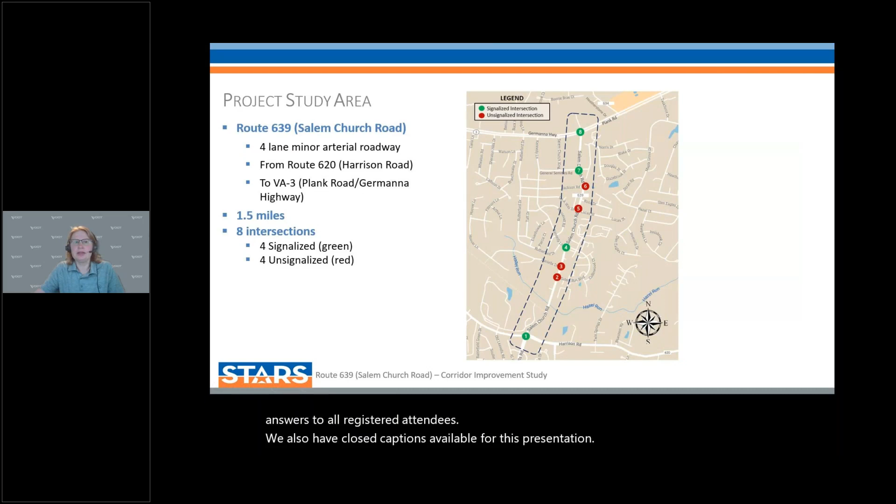This study is assessing potential operational, multimodal, and safety improvements along the corridor of Route 639, Salem Church Road, between Route 3, Plank Road, and Route 620, Harrison Road in Spotsylvania County. This segment is 1.5 miles long with 4 signalized intersections and 4 unsignalized intersections as part of the study.

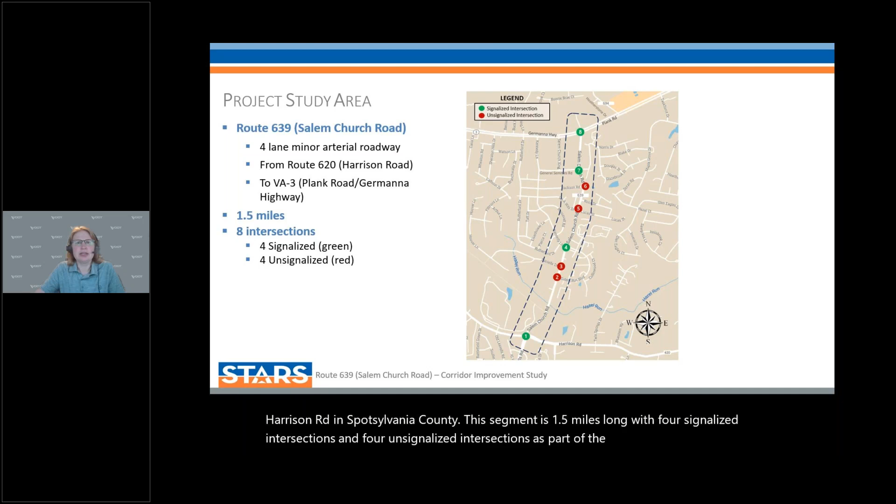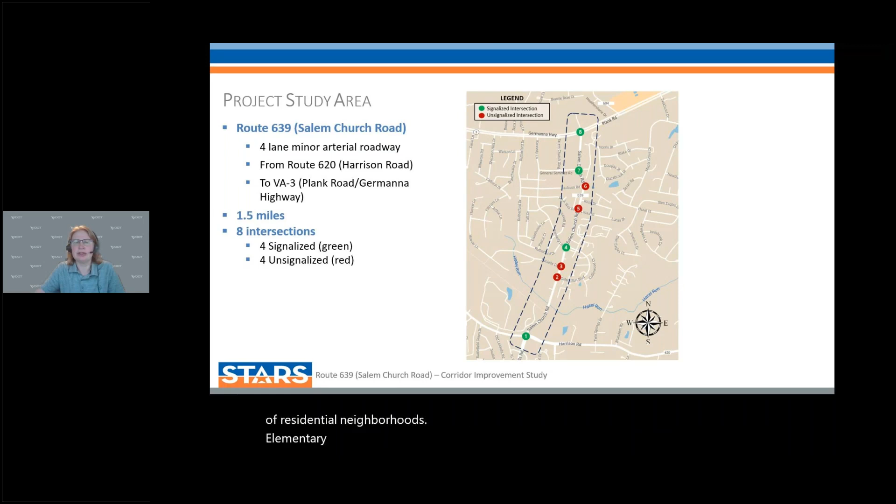Salem Church Road is a minor arterial with a posted speed limit of 45 miles per hour. The land uses along this corridor consist of residential neighborhoods, an elementary school, a public library, senior apartments and medical facilities, a fire station, as well as additional commercial uses such as gas stations and restaurants.

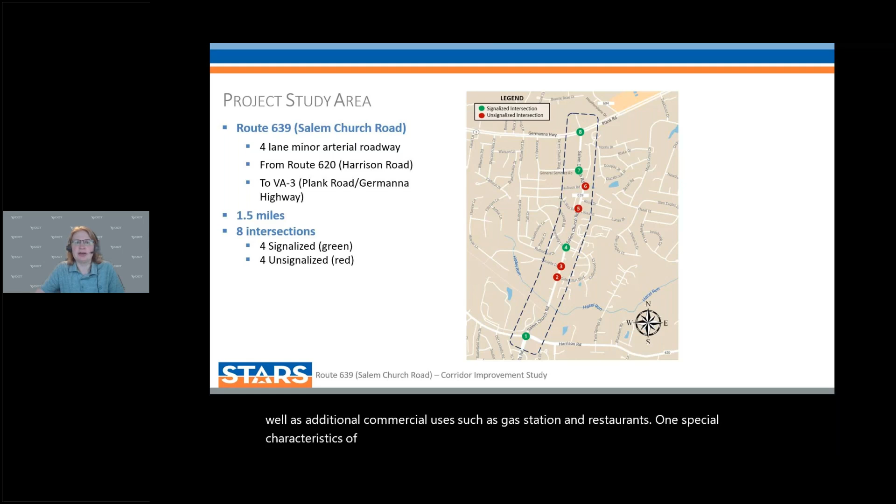One special characteristic of this roadway is that it provides a north-south connection to the west of I-95 and south from Route 3. Incidents that occur on I-95 and Route 1 corridors can divert traffic into the study area.

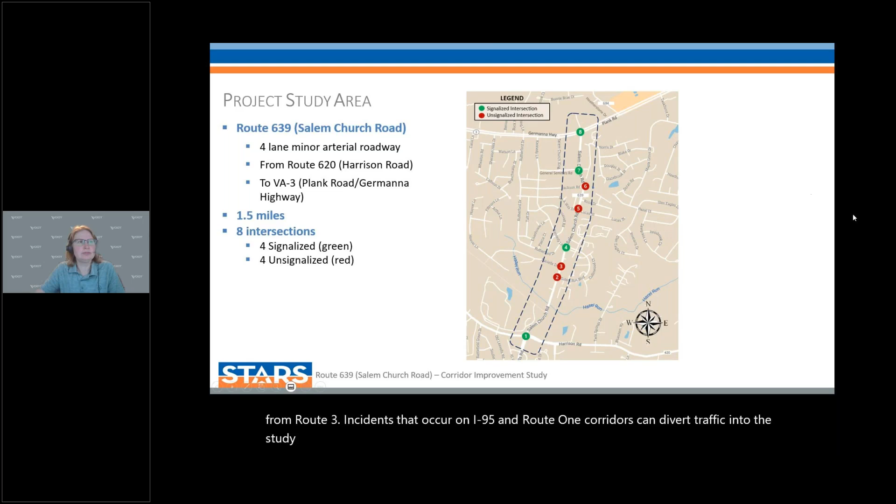The purpose of the study is to consider and evaluate potential improvements to alleviate congestion and address safety, multimodal, and access management issues. The study team analyzed current and future traffic operations and safety conditions to propose potential improvements.

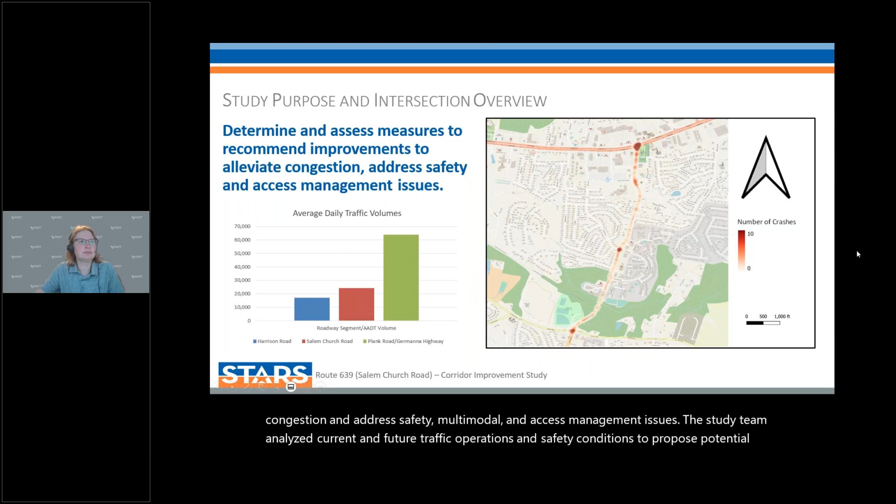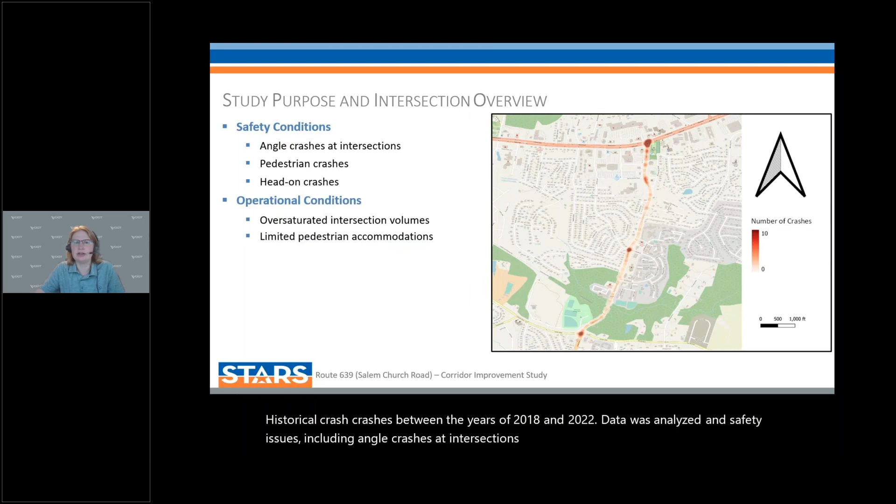Historical crashes between the years of 2018 and 2022 were analyzed, and safety issues including angle crashes at intersections and head-on crashes along segments were identified. Locations of pedestrian crashes were identified to evaluate potential safety concerns and opportunities for improvements.

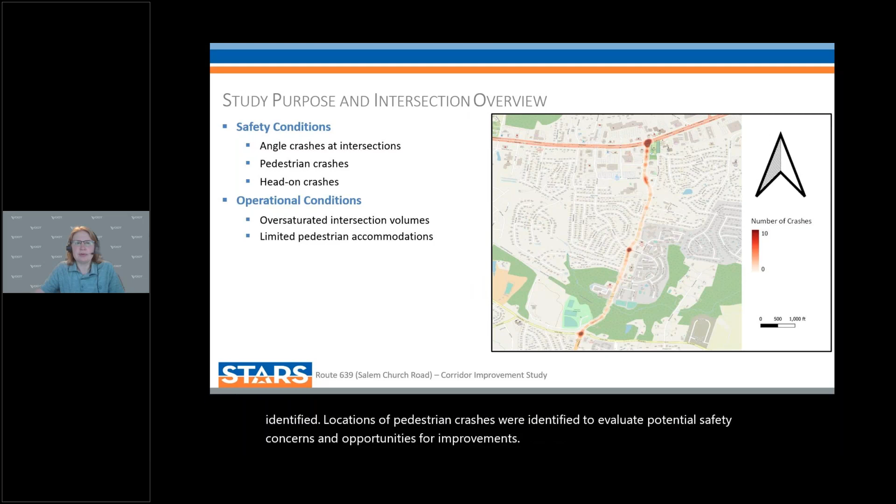Traffic operational conditions include very heavy traffic demand and peak hour congestion at both ends of the study area: the intersections with Salem Church Road and Plank Road, as well as Salem Church Road and Harrison Road.

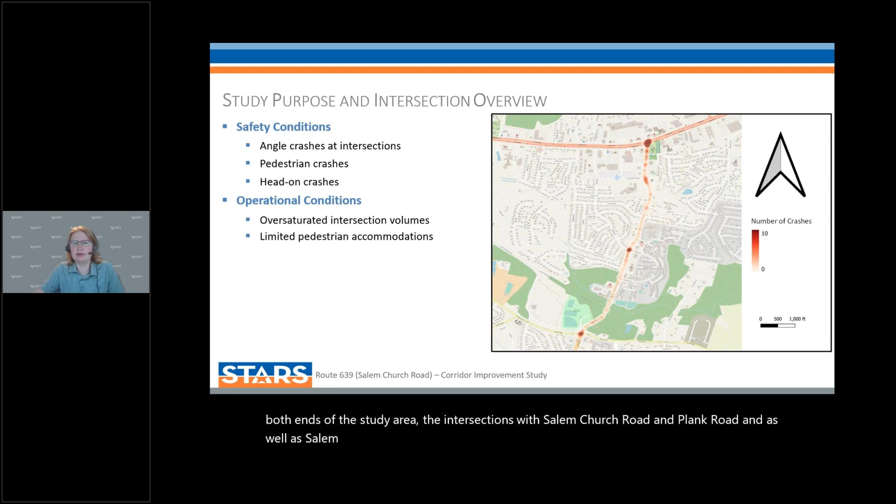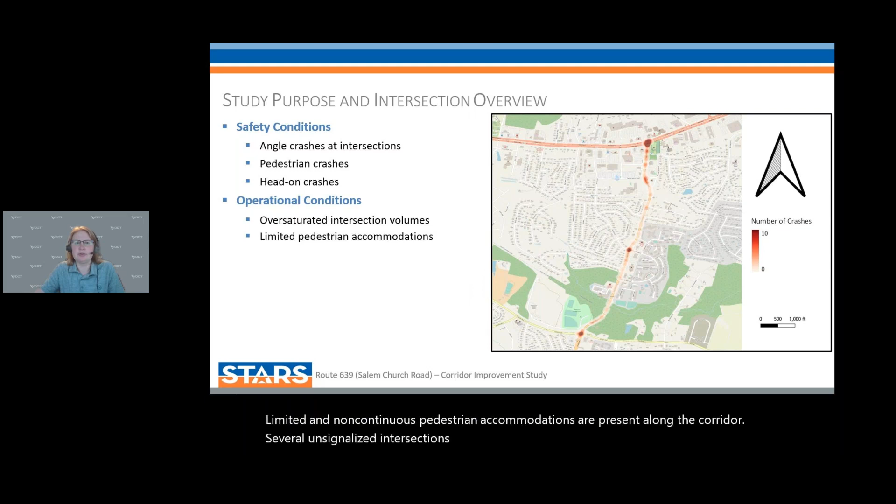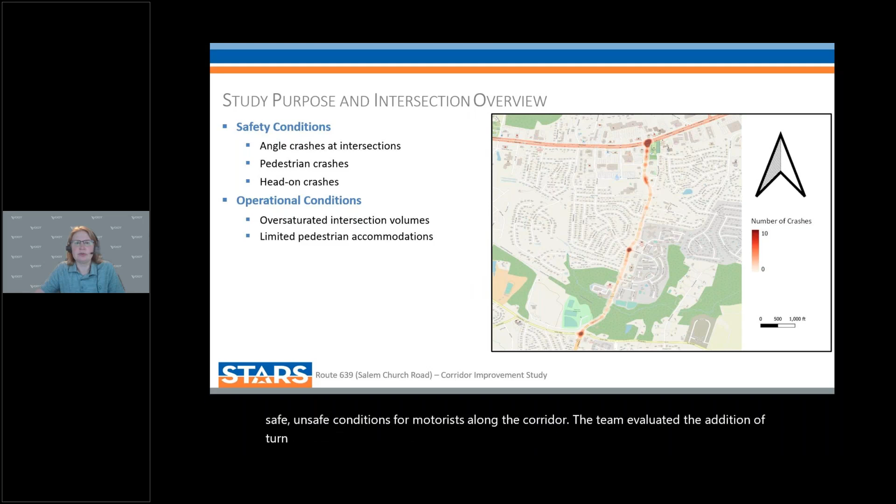Limited and non-continuous pedestrian accommodations are present along the corridor. Several unsignalized intersections and median openings along with roadway curvature create unsafe conditions for motorists along the corridor. The team evaluated the addition of turn lanes, signal phasing improvements, and innovative intersections to improve the existing conditions along the corridor.

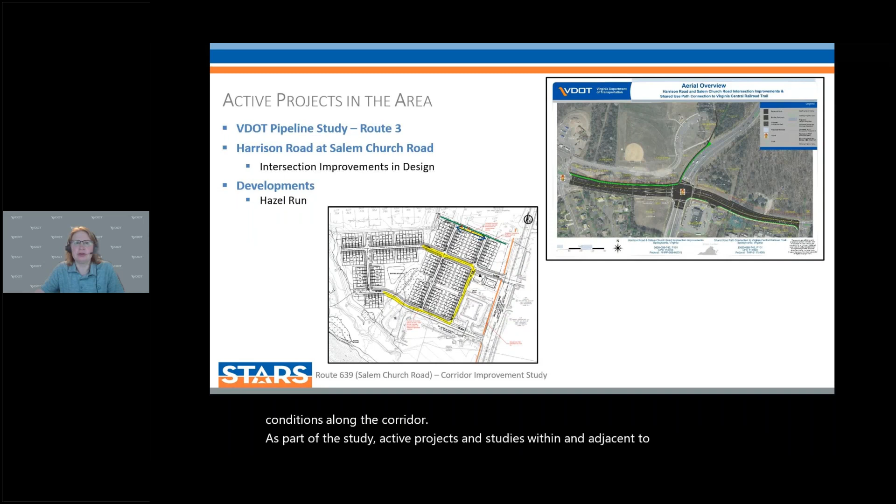As part of the study, active projects and studies within and adjacent to the corridor were reviewed for potential impacts. There is one other study being conducted along Route 3, which includes the intersection with Route 639. Additionally, there are roadway improvements in design at the intersection with Route 620, Harrison Road.

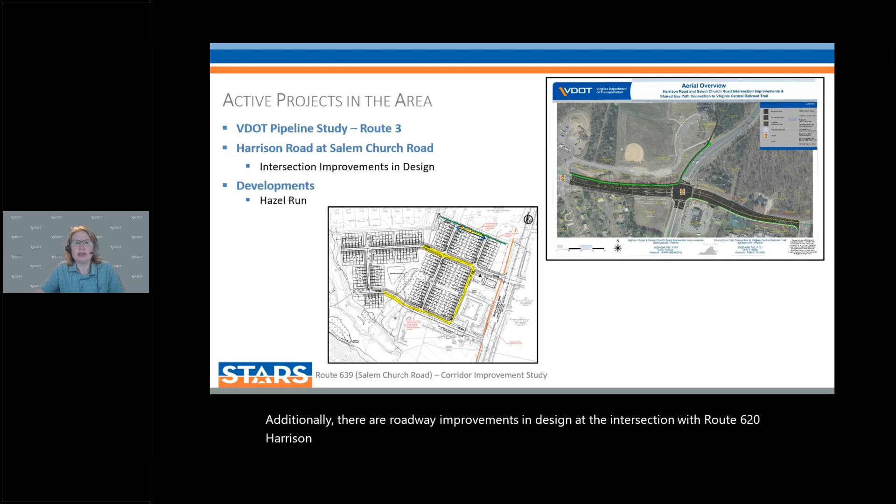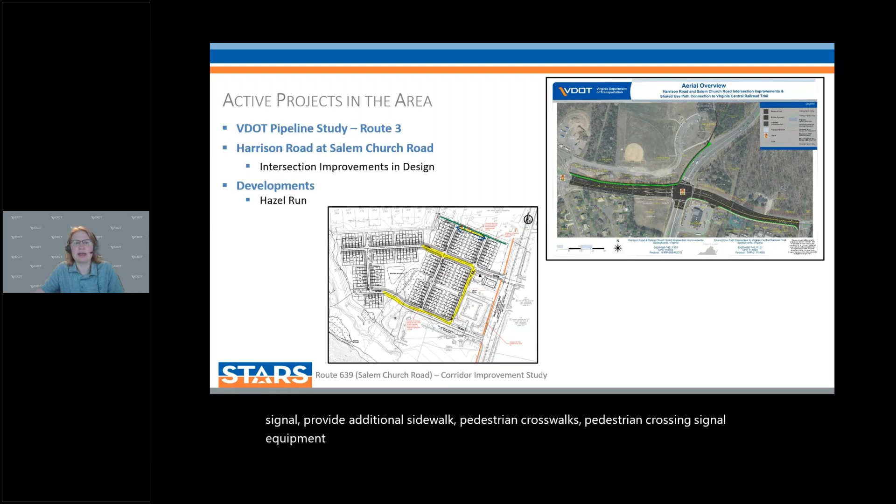This project is projected to begin construction in 2027 and will replace the traffic signal, provide additional sidewalk, pedestrian crosswalks, pedestrian crossing signal equipment, and a shared use path connection to the Virginia Central Railroad Trail. There's a proposed development, the Hazel Run Residential, planned for the southern portion of the study area, near the intersection of Salem Run Boulevard.

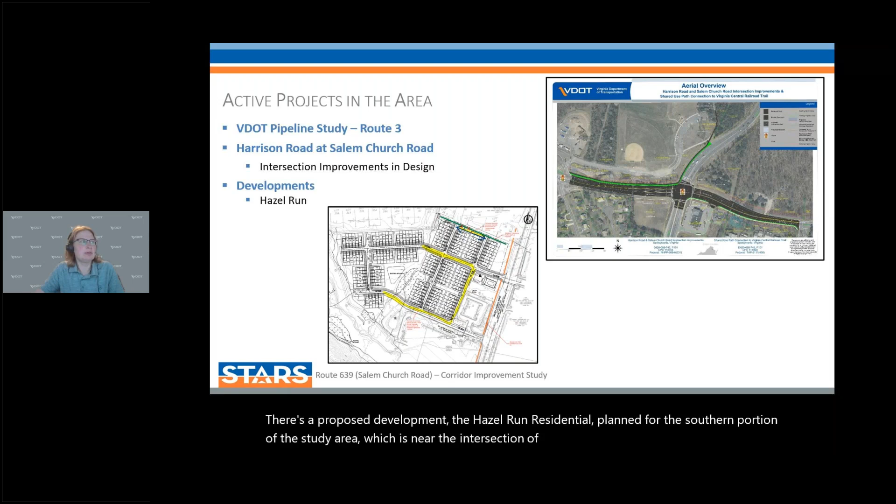Now let's take a look at the proposed changes at each of the study area intersections.

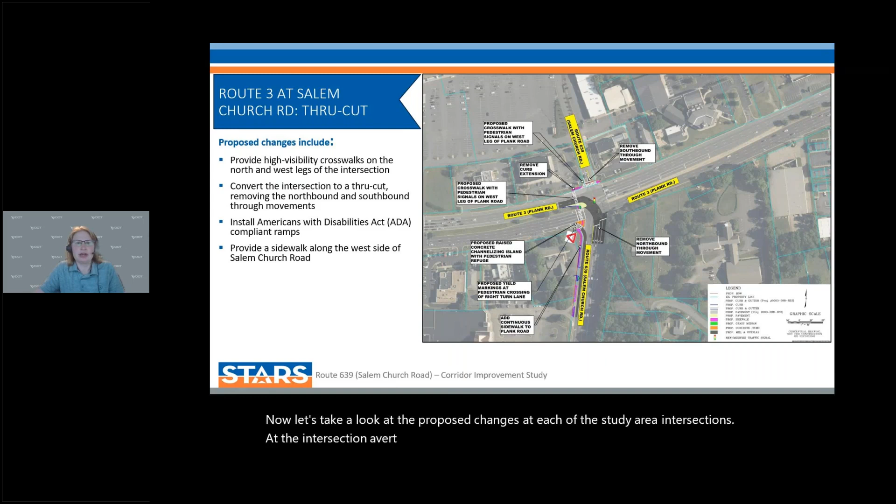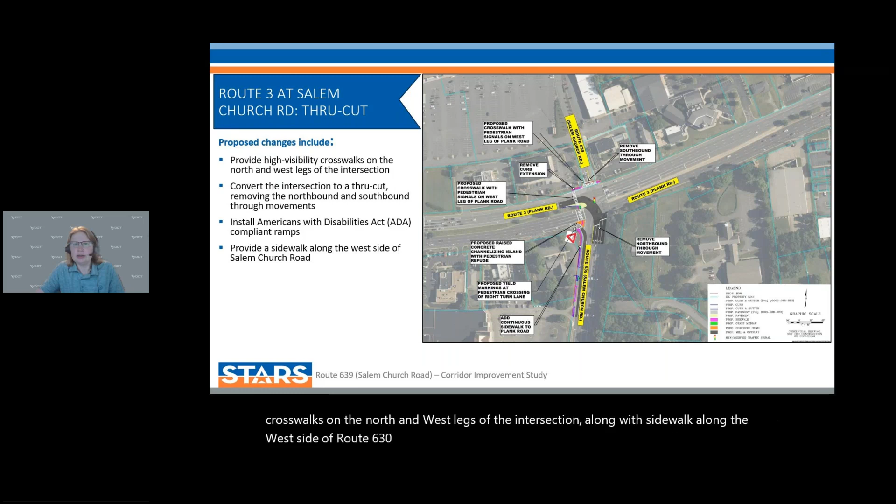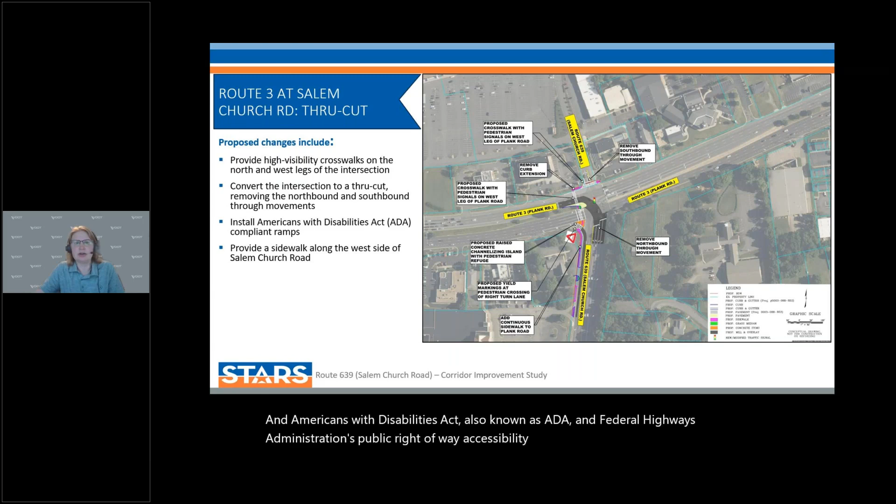At the intersection of Route 3 and Route 639, proposed changes include providing high visibility crosswalks on the north and west legs of the intersection, along with sidewalk along the west side of Route 639, and ADA and Federal Highway Administration's PROWAG compliant ramps at each of the crossings.

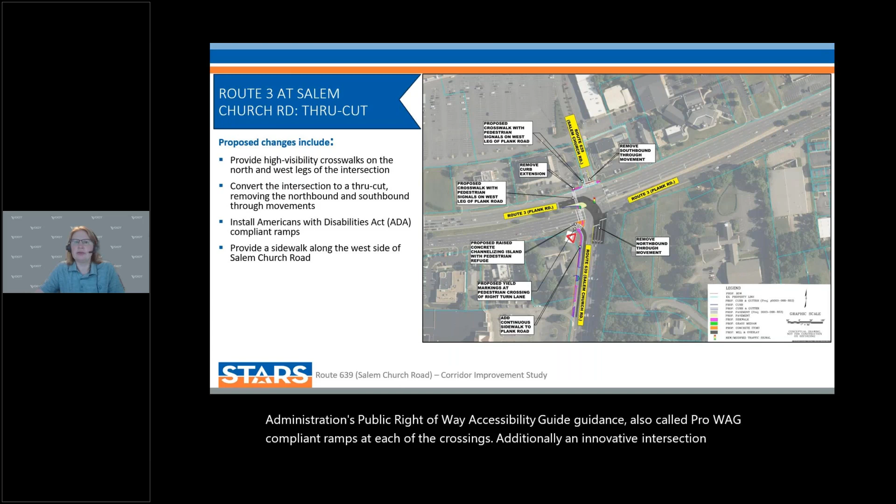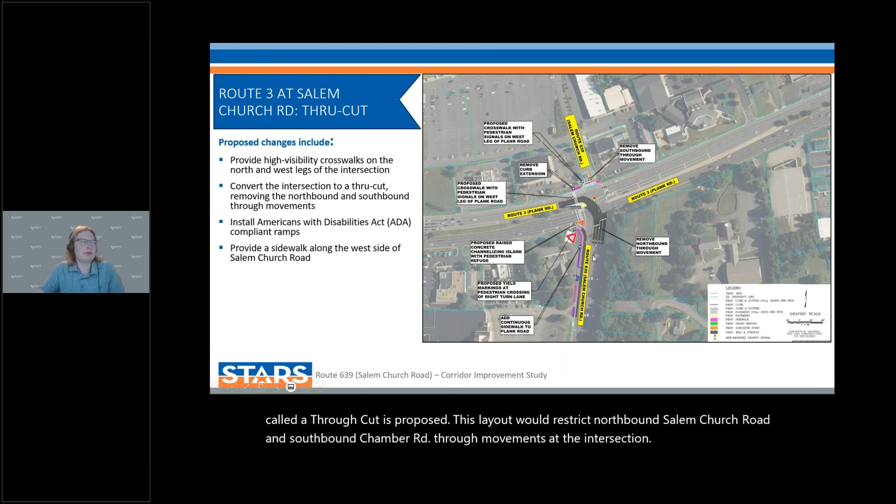Additionally, an innovative intersection layout called a through cut is proposed. This layout would restrict northbound Salem Church Road and southbound Chamber Road through movements at the intersection. So traveling from the south going through to the commercial area, or coming south from the commercial area onto Salem Church Road, would be restricted.

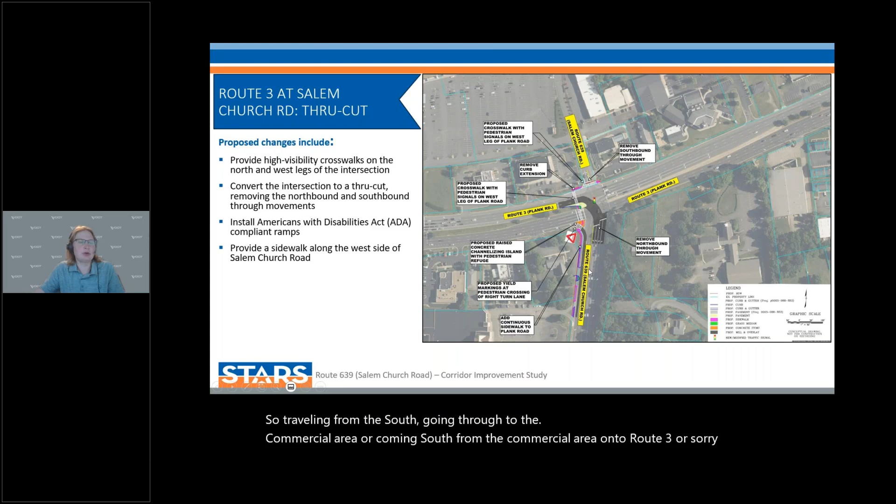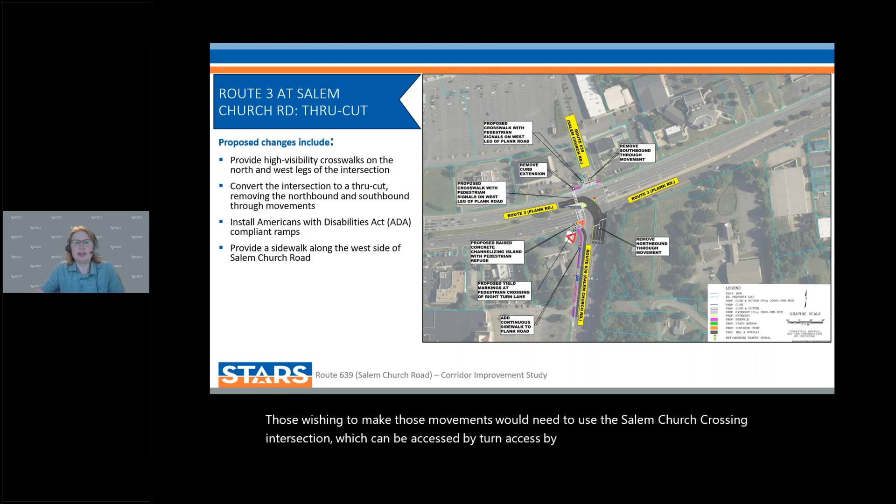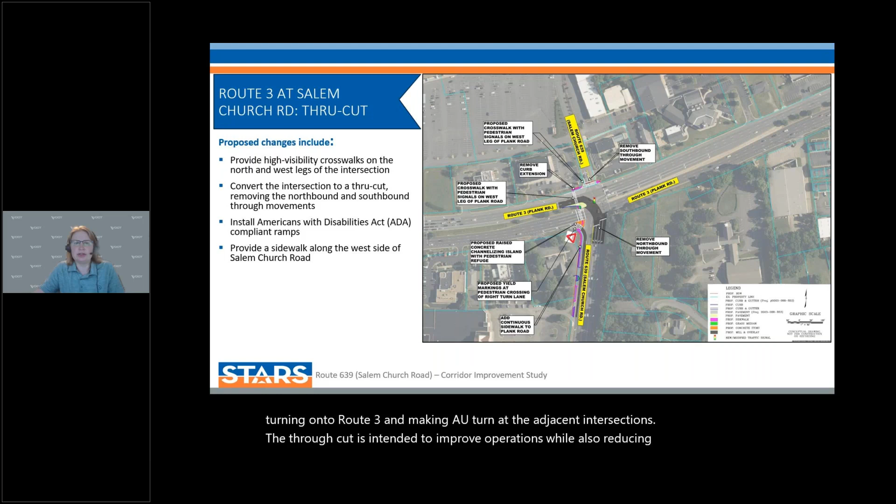Those wishing to make those movements would need to use the Salem Church Crossing intersection, which can be accessed by turning onto General Semis Road or by turning onto Route 3 and making a U-turn at the adjacent intersections. The through cut is intended to improve operations while also reducing conflict points at the intersection, thereby potentially reducing the risk of crashes.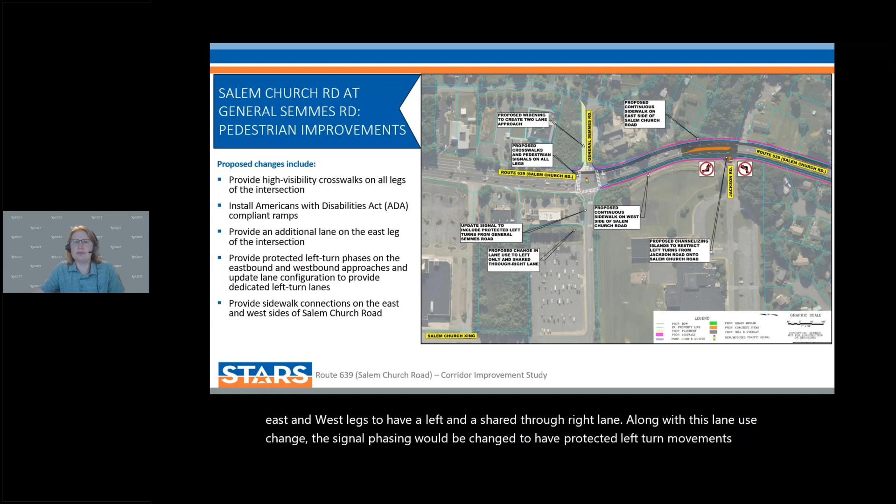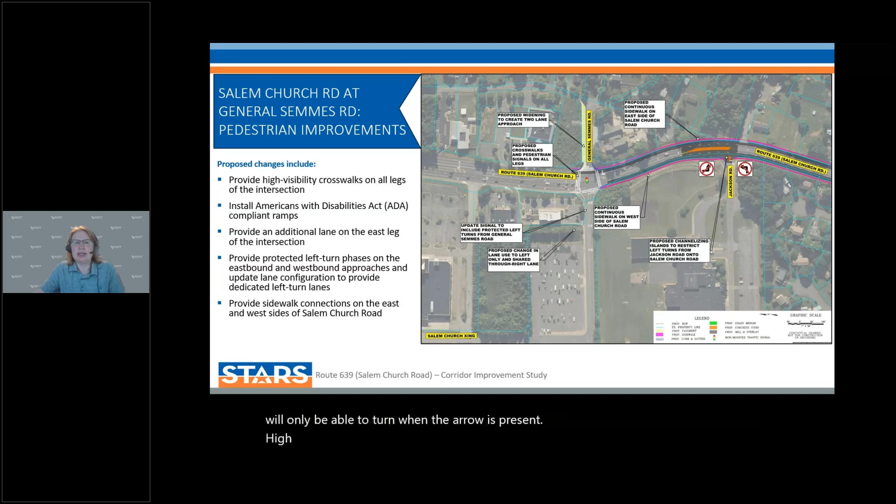A protected left turn phase means drivers will have a left turn arrow and will only be able to turn when the arrow is present. High visibility crosswalks and PROWAG and ADA compliant ramps and sidewalk connections are proposed for all four legs of the intersection.

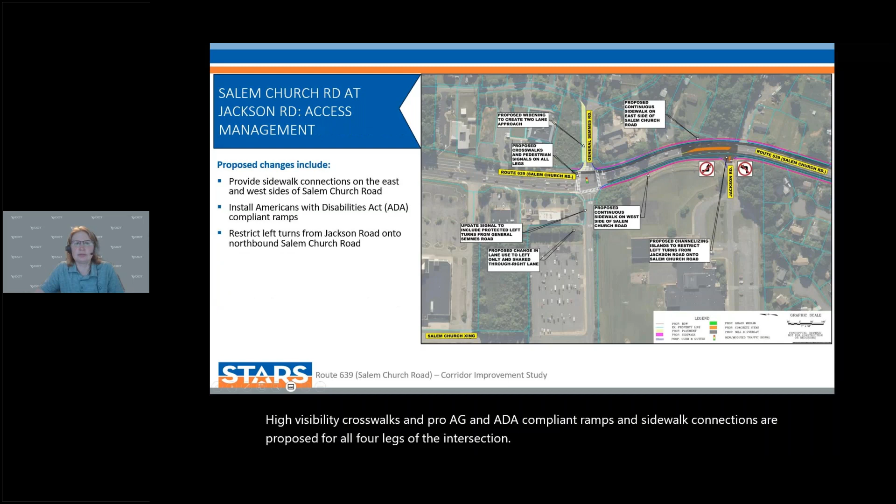At the intersection of Route 639 and Jackson Road, the proposed changes include providing continuous sidewalk on the east and west sides of Route 639 with ADA compliant ramps.

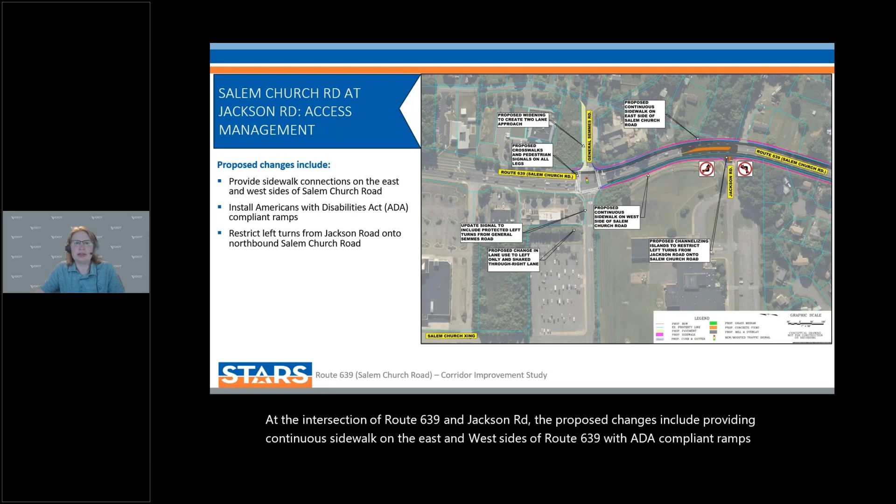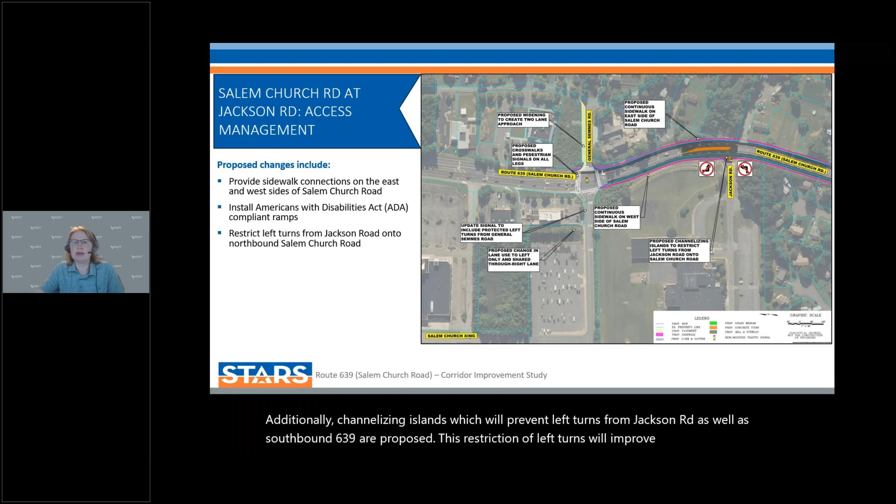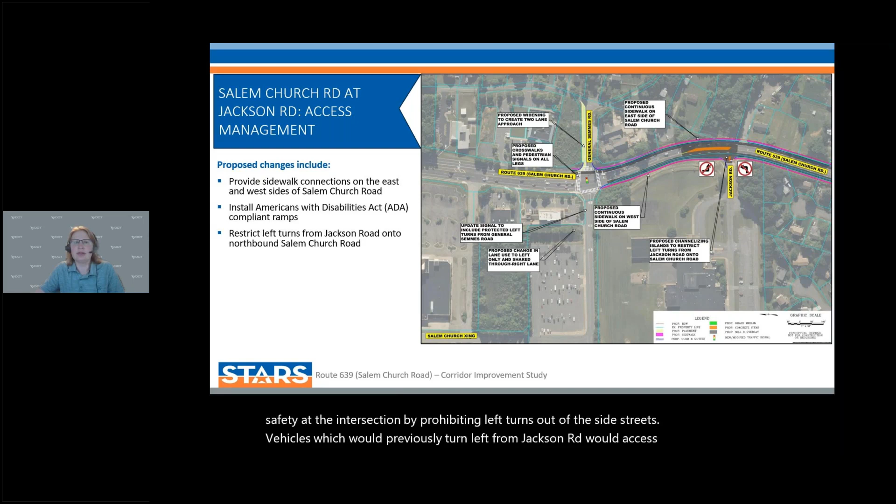Additionally, channelizing islands, which will prevent left turns from Jackson Road as well as southbound 639, are proposed. This restriction of left turns will improve operations as well as safety at the intersection by prohibiting left turns out of the side streets. Vehicles which would previously turn left from Jackson Road would access 639 from Kennedy Lane and General Semmes Road.

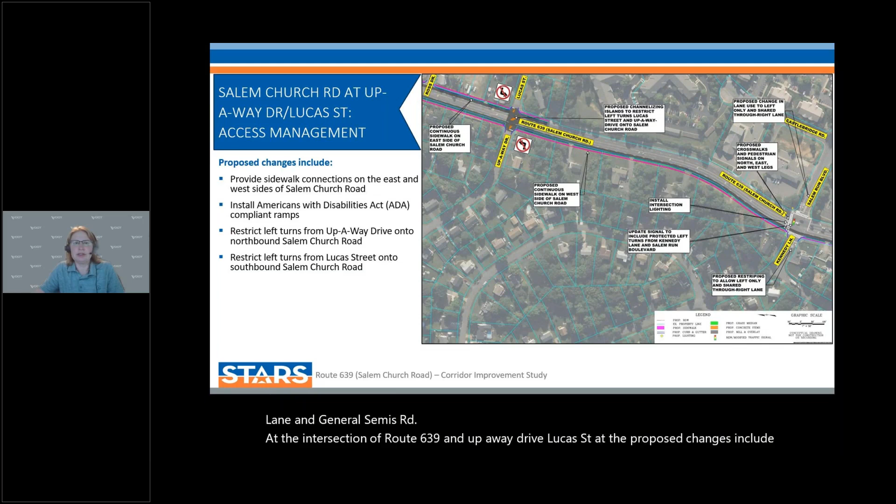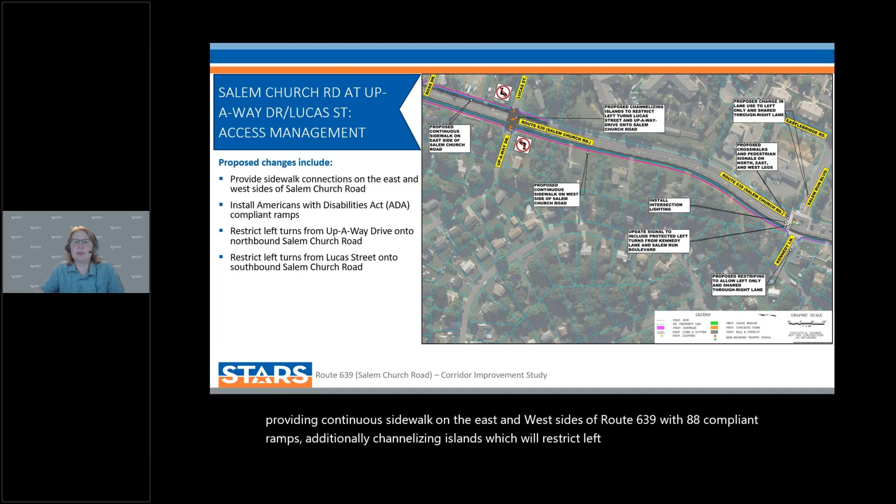At the intersection of Route 639 and Up-A-Way Drive, Lucas Street, the proposed changes include providing continuous sidewalk on the east and west sides of Route 639 with ADA compliant ramps. Additionally, channelizing islands, which will restrict left turns from Up-A-Way Drive and Lucas Street, are proposed. This restriction of left turns will improve operations as well as safety at the intersection.

Vehicles which currently turn left from Up-A-Way Drive and Lucas Street would access Salem Church Road from Kennedy Lane and Ross Drive, respectively.

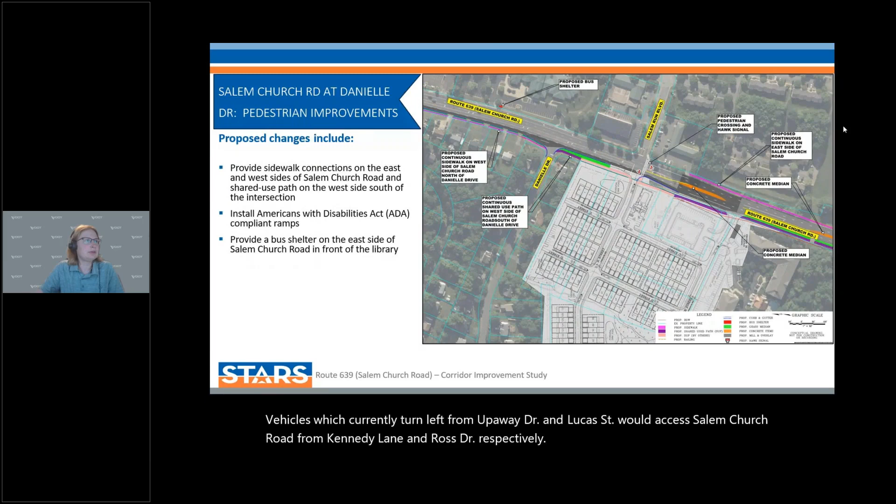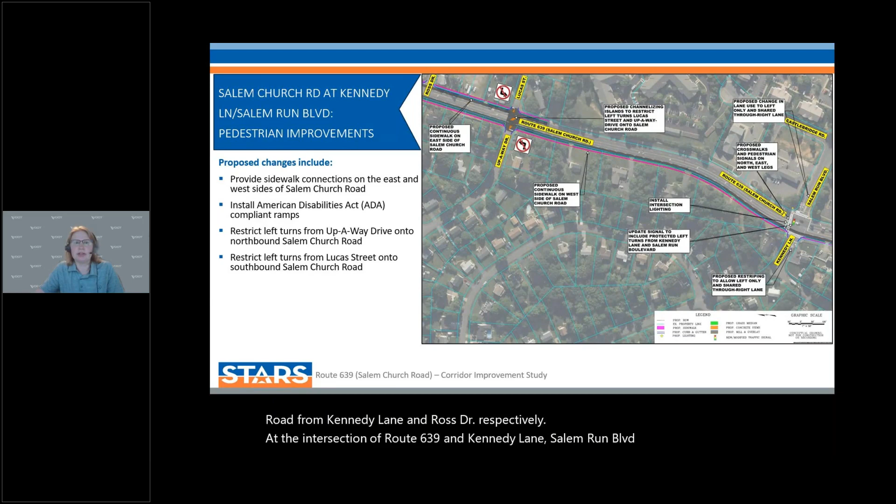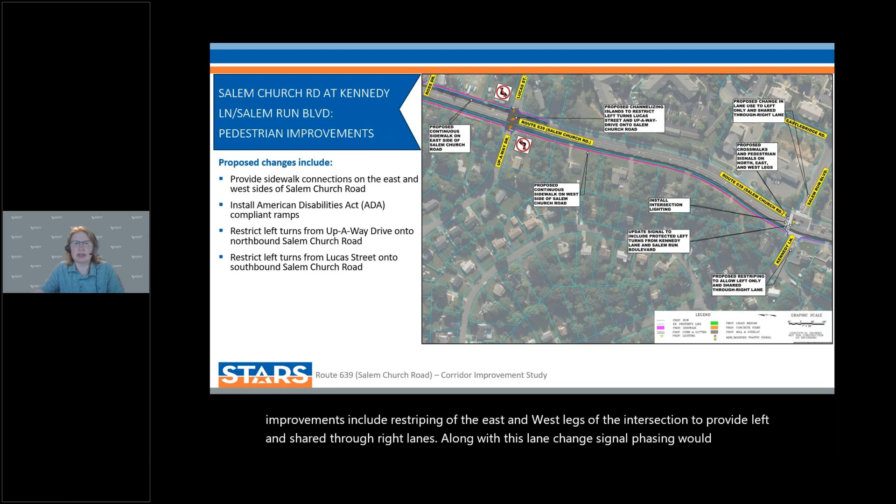At the intersection of Route 639 and Kennedy Lane, Salem Run Boulevard, the proposed improvements include restriping of the east and west legs of the intersection to provide left and shared through-right lanes. Along with this lane change, the signal phasing would be changed to have protected left turn movements from Kennedy Lane and Salem Run Boulevard. For the protected left turns, drivers will have a left turn arrow and will only be able to turn when the arrow is present.

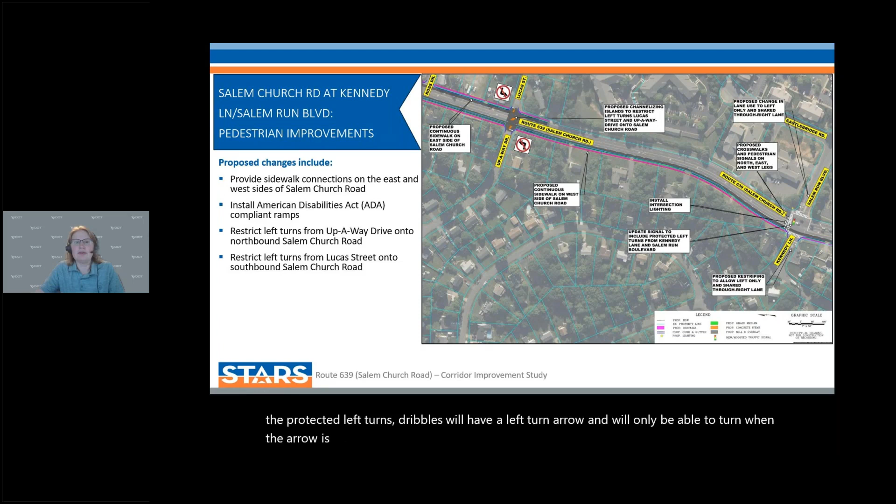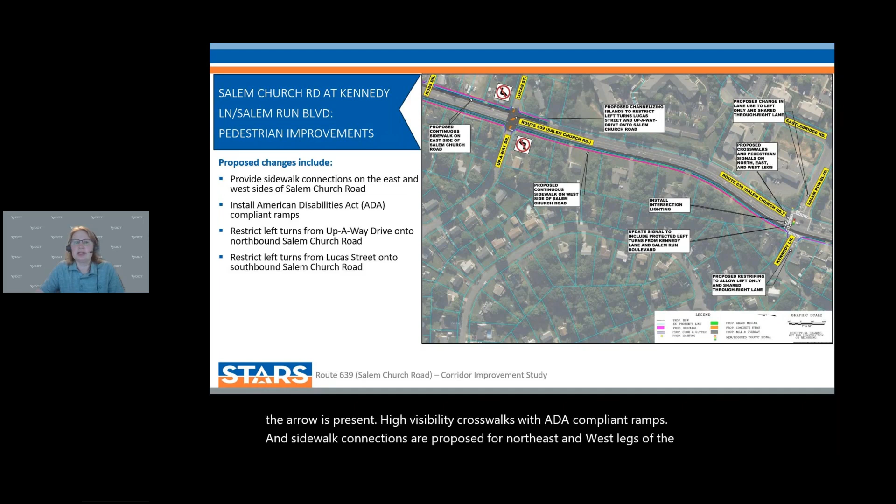High visibility crosswalks with ADA compliant ramps and sidewalk connections are proposed for north, east, and west legs of the intersection. Intersection lighting is also proposed to improve the safety of pedestrians crossing in dark conditions.

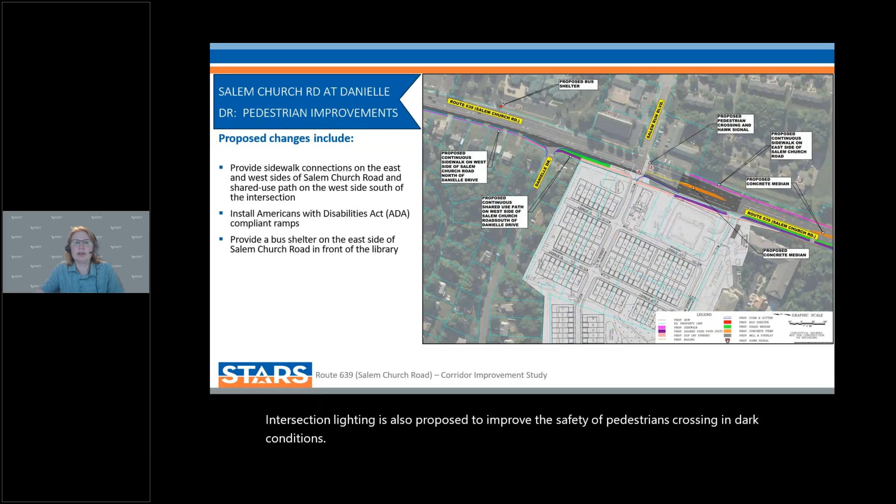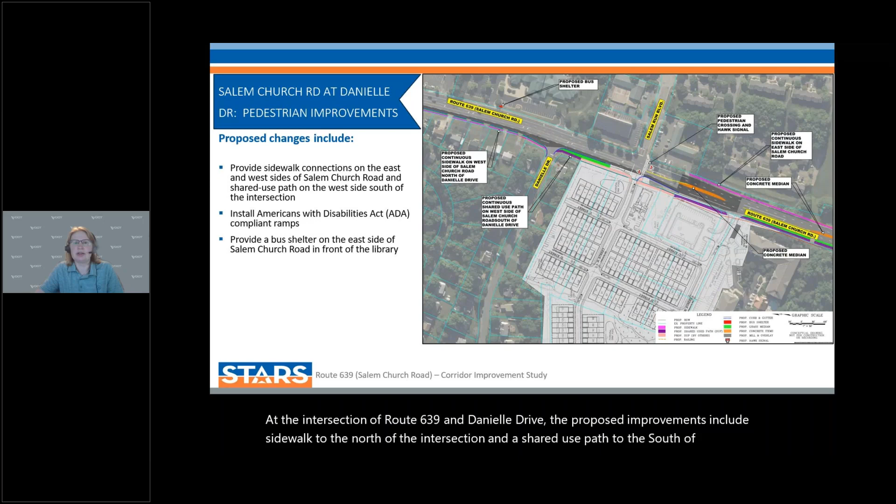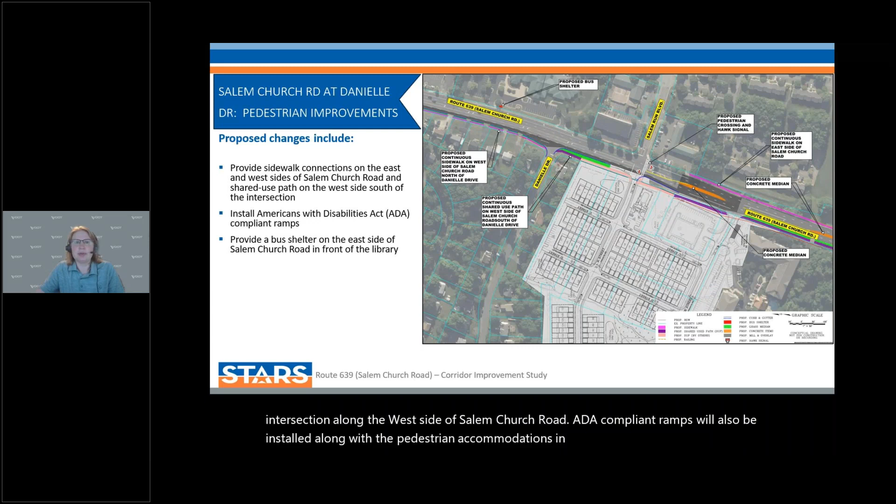At the intersection of Route 639 and Danielle Drive, the proposed improvements include sidewalk to the north of the intersection and a shared use path to the south of the intersection along the west side of Salem Church Road. ADA compliant ramps will also be installed along with the pedestrian accommodations. In addition, a bus shelter on the east side of Salem Church Road in front of the library is proposed.

At the intersection of Route 639 and Salem Run Boulevard, the proposed improvements include providing sidewalk connections on the east side of Salem Church Road and shared use path connections on the west side of Salem Church Road, along with providing ADA compliant ramps.

A high-intensity activated crosswalk, also known as a hawk signal, is proposed at the intersection to allow for pedestrians to cross the street in a safe manner after pushing the button and waiting for the light to change. A concrete median is proposed to the south of this location as a safety measure to address head-on collisions in the area.

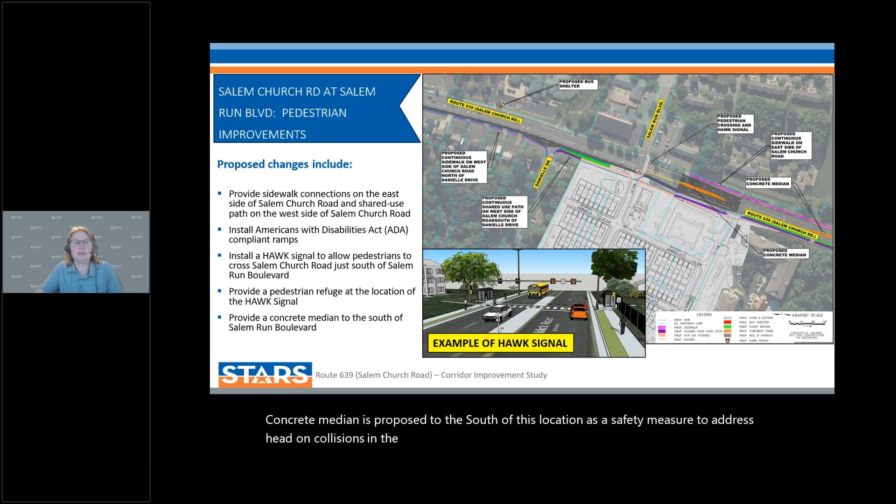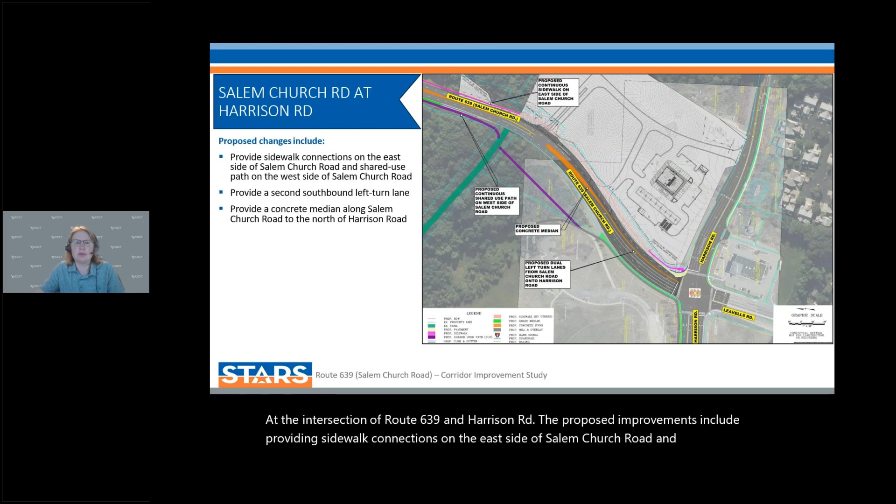At the intersection of Route 639 and Harrison Road, the proposed improvements include providing sidewalk connections on the east side of Salem Church Road and a shared use path on the west side, providing a second southbound left turn lane, and providing a concrete median along Salem Church Road north of Harrison Road. These improvements will improve safety for pedestrians and motorists, as well as providing congestion relief.

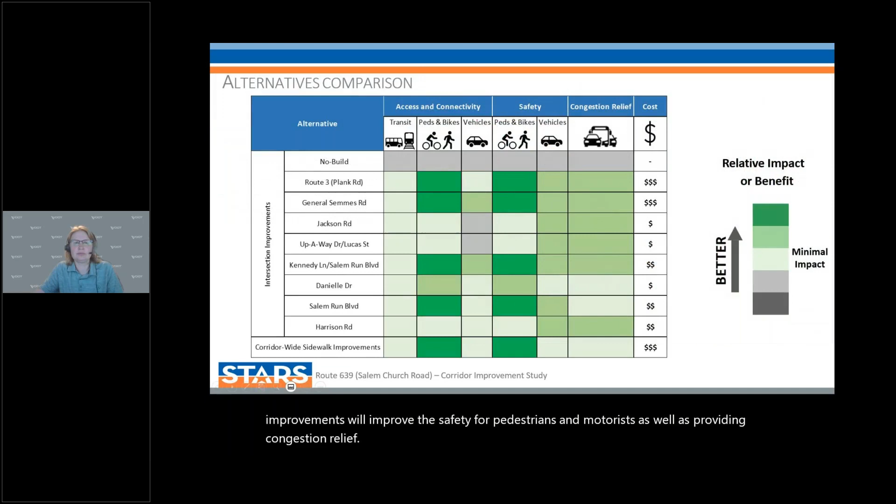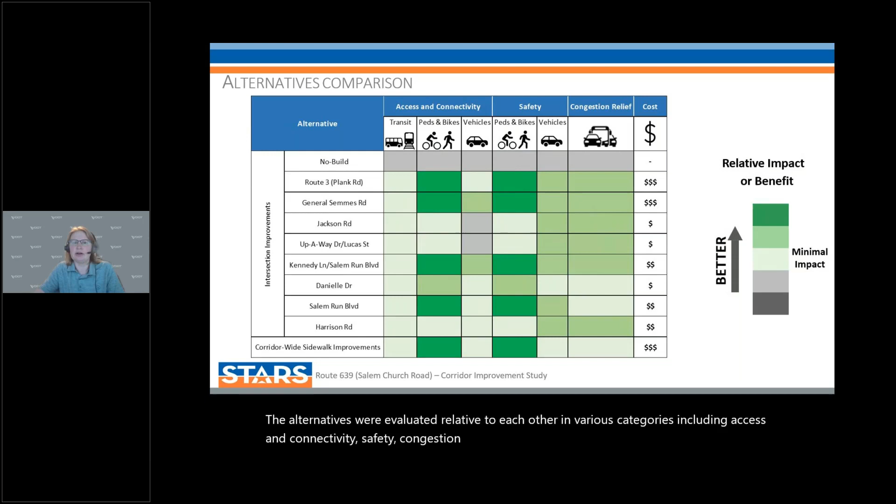The alternatives were evaluated relative to each other in various categories, including access and connectivity, safety, congestion relief, and cost. The darker shades of green in this chart represent greater positive impacts or benefits.

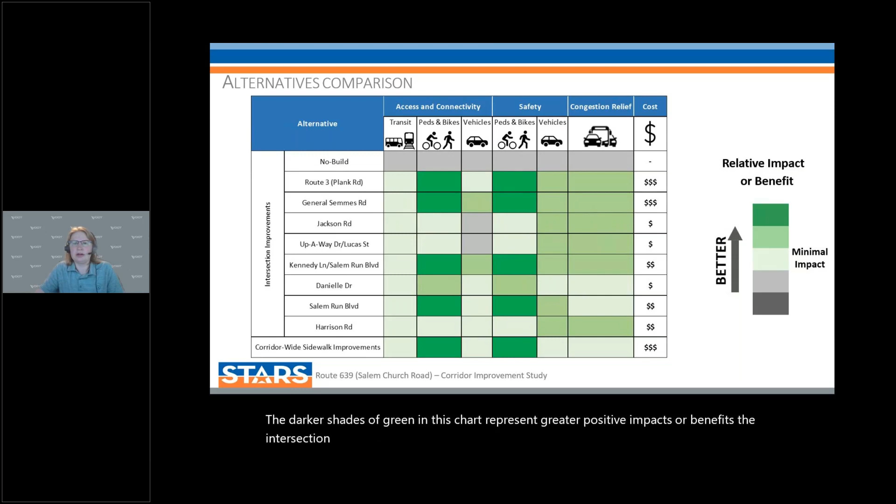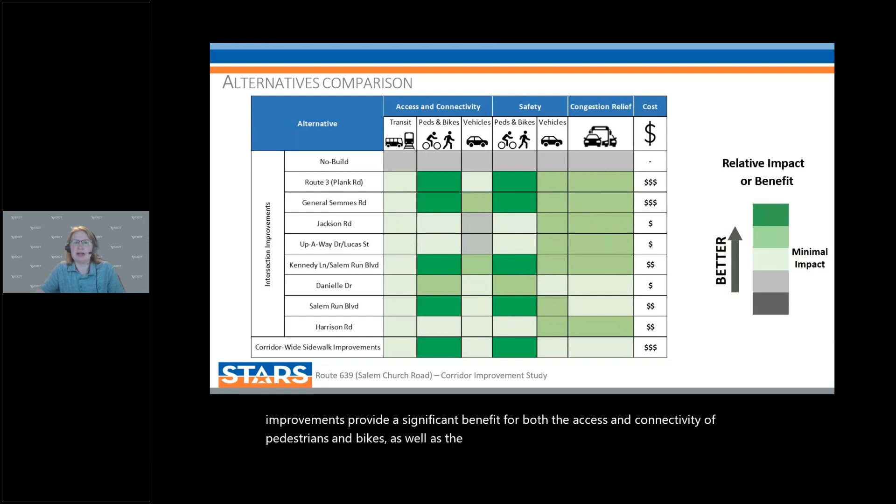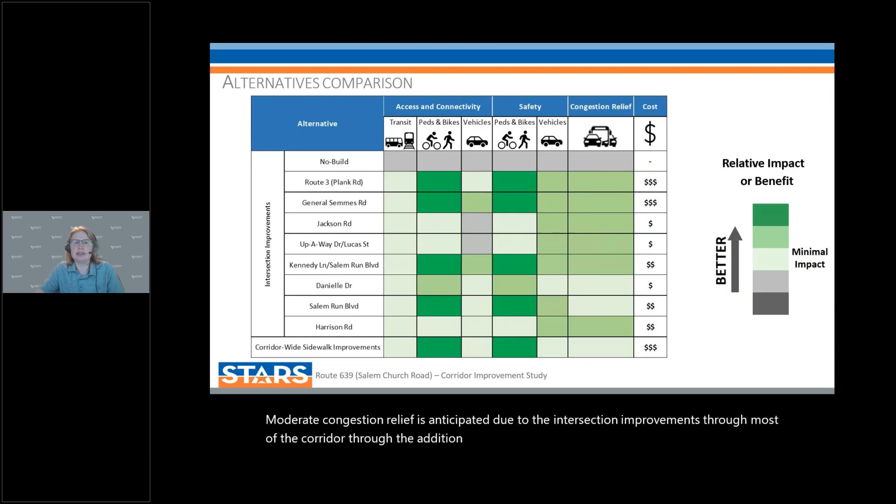The intersection improvements, along with corridor-wide sidewalk improvements, provide a significant benefit for both the access and connectivity of pedestrians and bikes, as well as safety, by providing high visibility controlled crossings. Moderate congestion relief is anticipated due to the intersection improvements through most of the corridor, through the addition of turn lanes, phasing changes, and access control measures. The highest cost measures include modifications of Route 3, General Semmes Road, and the corridor-wide sidewalk improvements.

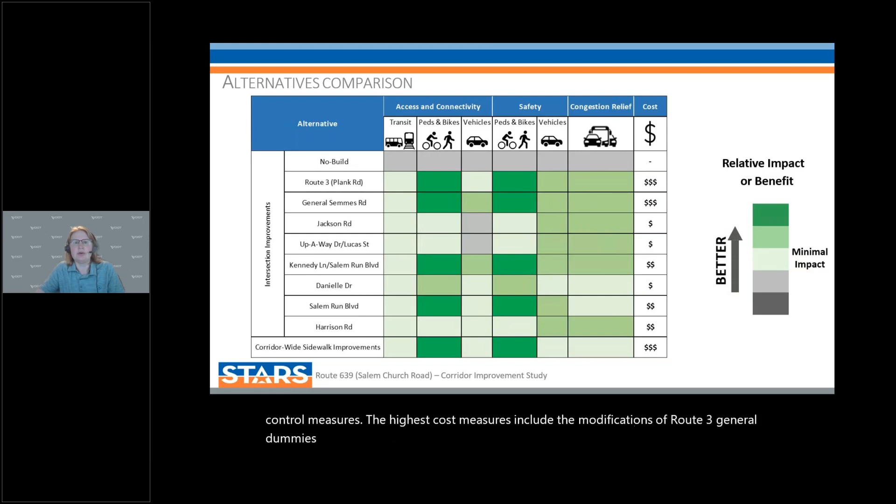The next steps for the study include evaluating the trade-offs, reviewing public input, and selecting the preferred alternative that addresses safety, operations, and has low impacts and cost implications. The study recommendations will be finalized and posted online later in 2024. Selected improvements will be applied for funding through Virginia's Smart Scale funding program. If selected through the competitive Smart Scale program, the projects will be included in the six-year improvement program, with funds earmarked for construction of the improvements.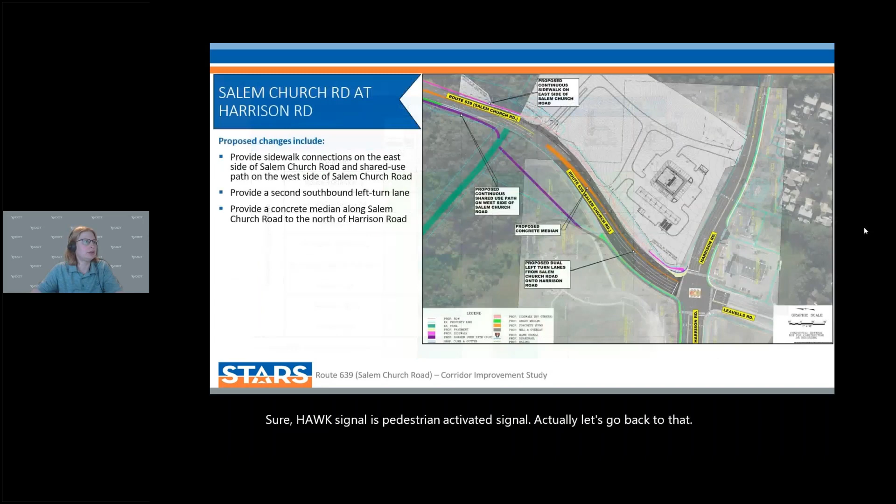Sure. A HAWK signal is a pedestrian activated signal. Let me actually go back to that picture we had up. So this is just kind of an example of a HAWK signal. The one proposed in this will be a little bit different because it's at an intersection, but a pedestrian will come up and push the push button.

It will go into a flashing yellow mode to allow cars to clear the intersection, and then it will go into a solid red where cars will have to stop. That will allow pedestrians to cross. After a bit of time, the light will go to a flashing red, at which point, if pedestrians have cleared the intersection, cars are allowed to go after stopping. Then it will go back to a dark signal, and vehicles will be allowed to freely flow through the intersection.

The next question is, when do you expect the study to move into construction? When would these projects be built?

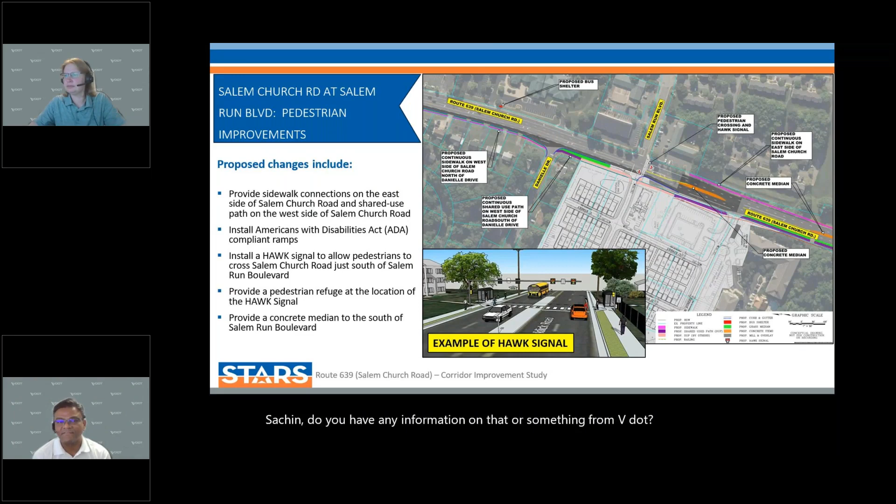This is a study at this point, and the objective is to come up with recommendations that will be fed into Smart Scale applications. Smart Scale is a competitive program where localities pursue funding, competing against each other based on benefits and cost. If projects are selected, funding is awarded, but it takes several years, up to 6 years, for the funding to become available. So any recommendations selected out of this study, we're looking at 6 years before construction can begin.

The next question is, are bus shelters part of these improvements? As part of our preferred alternative, we are proposing a bus shelter on the east side of Salem Church Road in front of the library near Danielle Drive.

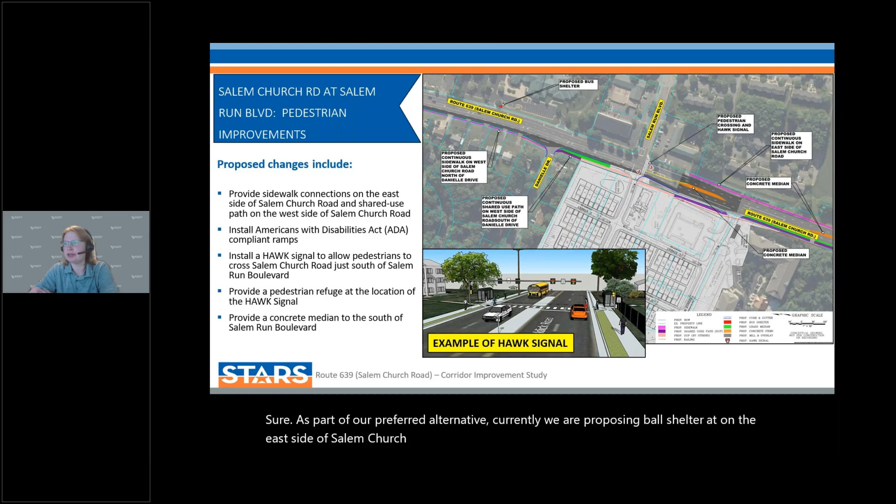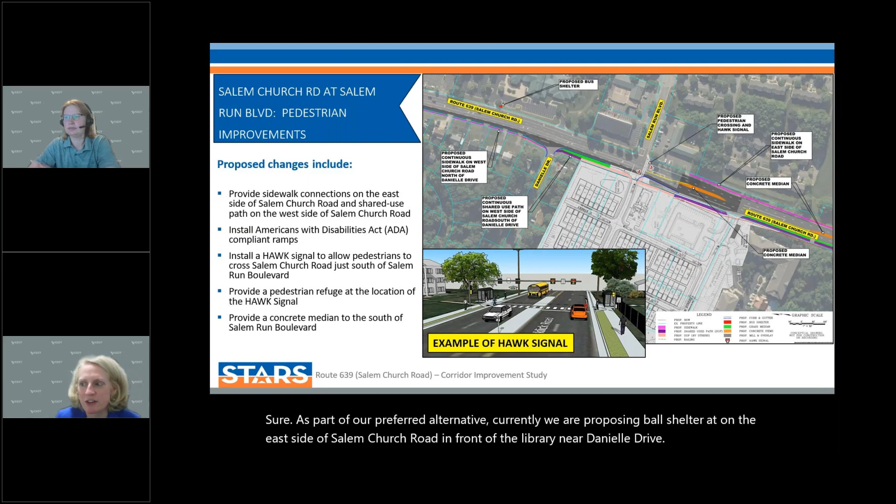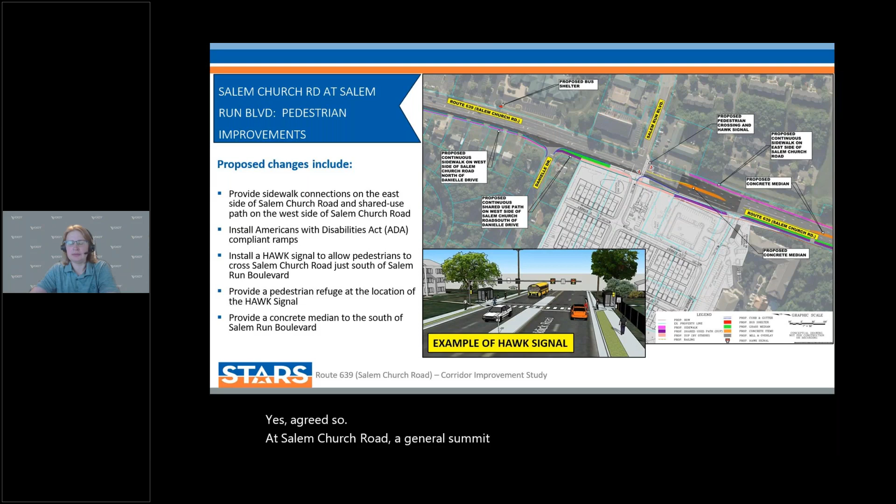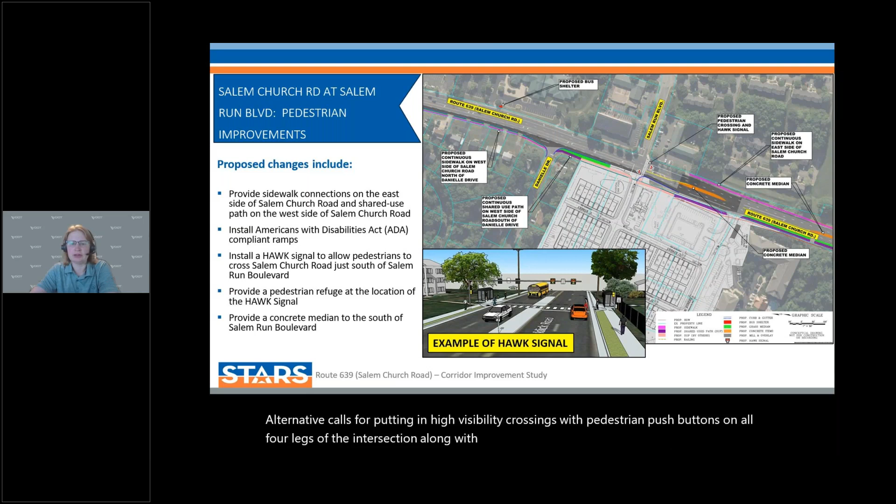The next question is, what are your plans for the crosswalk at Salem Church Road and General Semmes Road? That intersection could use some improvements, especially for pedestrians. Yes, agreed. The alternative calls for putting in high visibility crossings with pedestrian push buttons on all 4 legs of the intersection, along with a sidewalk to connect all 4 of those corners.

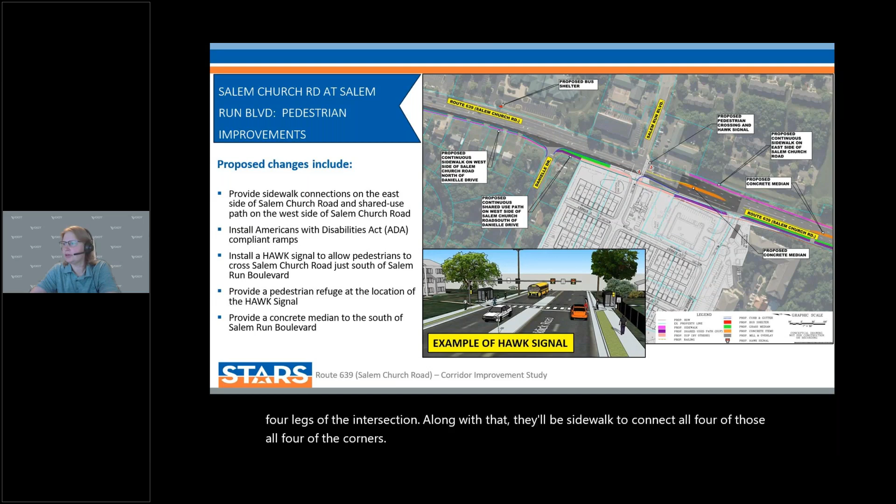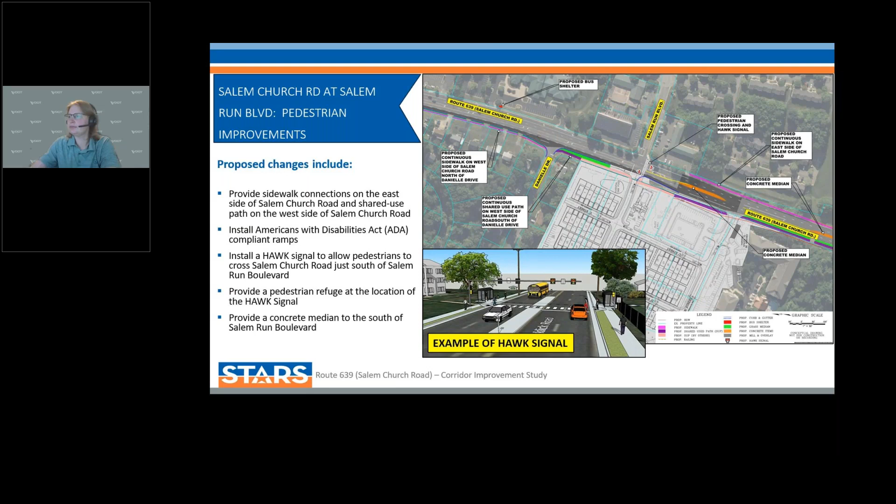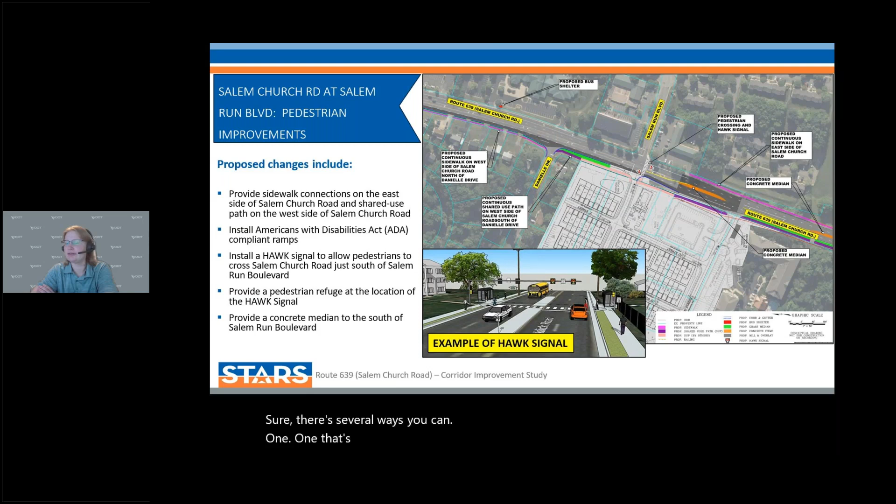We've had another question come in: will the speed limit remain 45 miles an hour? Currently, as part of this study, we are not recommending a reduction in speed, so it is proposed to remain at 45.

Good evening, Paul Agnello from Spotsylvania. I just wanted to make a quick comment. The Wawa site plan basically is not moving ahead. Another development may move there, but we don't have a concrete proposal at this point in time. There was a rezoning, so it's zoned for commercial, but there's nothing actually coming in right away. The other point is that some potential frontage improvements associated with developments, like the Harrison Road residential, could happen more quickly than the Smart Scale timeline. Also, some of the improvements shown at the southernmost slide are part of an existing Smart Scale project that's funded, or a TAP project, and those are on a quicker time frame as well.

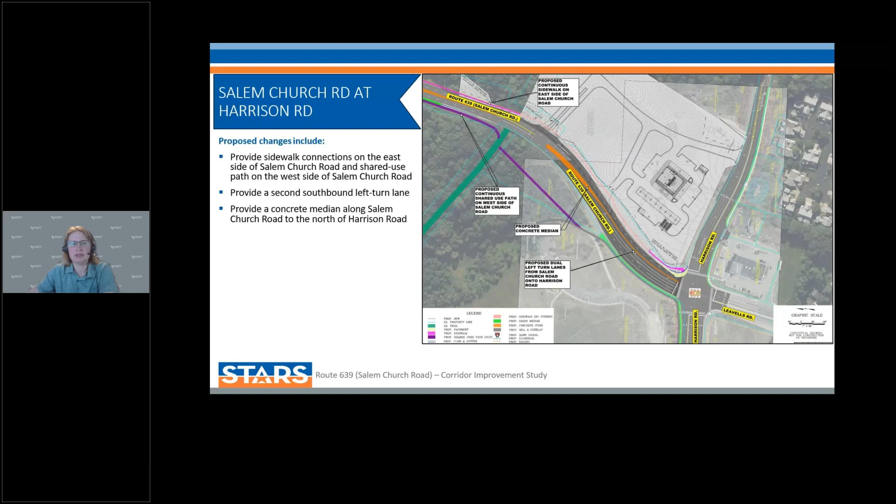To follow on with that, we did incorporate those projects into our baseline design, so they wouldn't overlap.

Yes, and thank you very much for your work on the study. Great presentation tonight. Thank you.